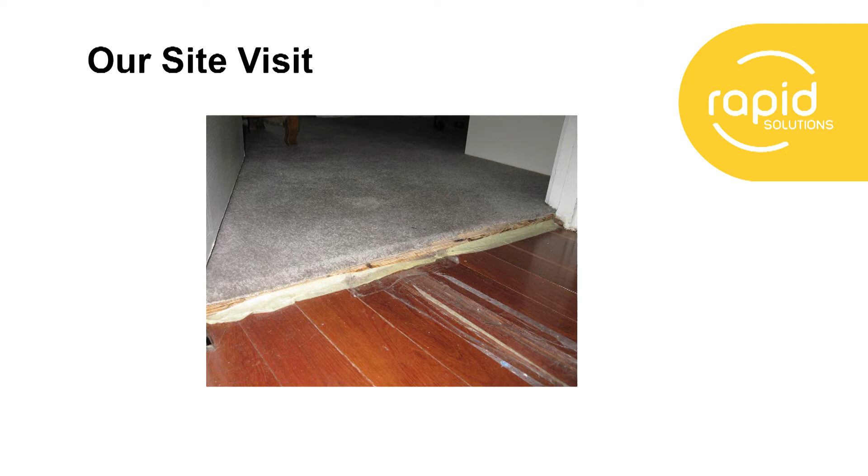So it doesn't really matter whether it's pre-purchase timber pest or pre-purchase building. They both have the date and time of the inspection, the weather conditions, and whether or not the building is occupied, which obviously affects how much access there is to inspect on a visual inspection.

Then it goes to the scope. Now the scope deals with what the purchaser can expect the inspector to have done, and what it says is the building and property within 30 metres of the building subject to inspection. So fairly standard stuff - the main building was inspected, as were the surroundings up to 30 metres. And this is a rural property, so there were 30 metres pretty much in all directions from the property.

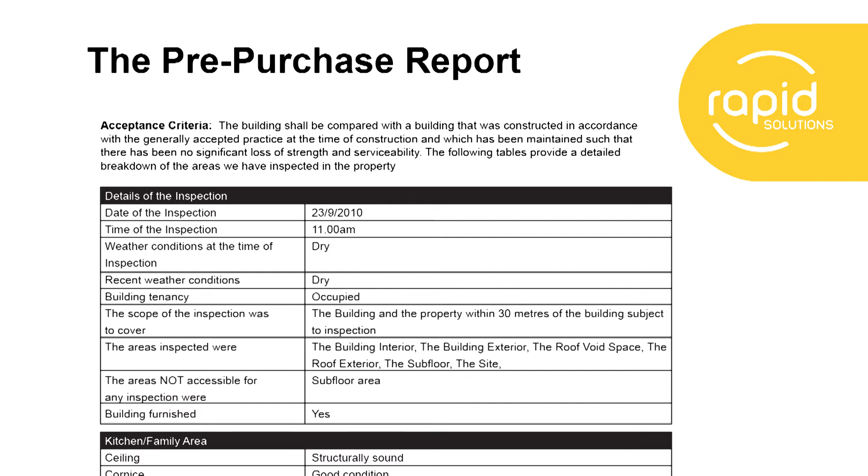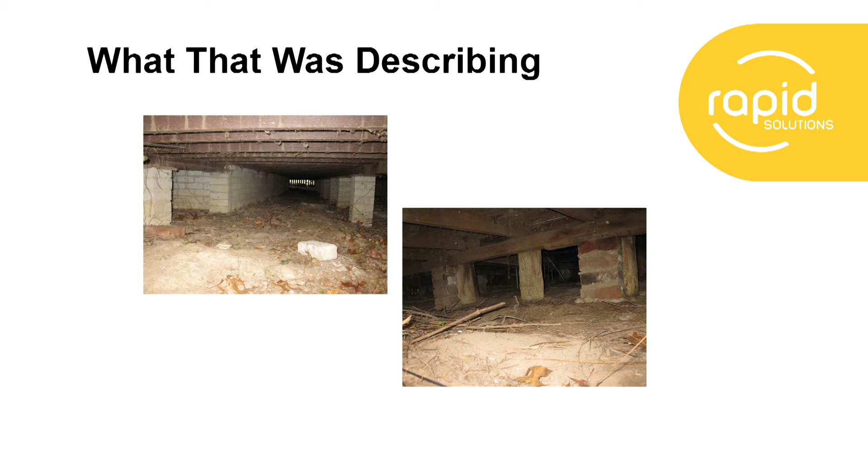All of that is absolutely right. You see from that photo on the previous slide that there are in fact brick posts, steel posts, and timber stumps. It's quite true, quite right to say that timber stumps provide a concealed entry point for termites.

The problem, however, wasn't particularly any of that. There was some rumbling from the homeowner about the fact that if he'd known there were timber stumps holding up the house, he wouldn't have bought it, and that kind of thing. But really and truly, that wasn't the issue in this case.

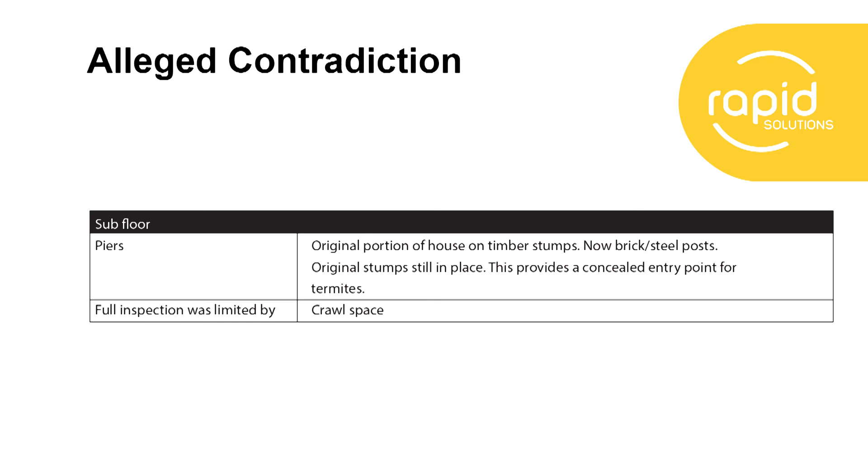So that's the first case study. Now moving on to the second case study.

The second case study is a claim from New South Wales, where a father and son conducted an inspection together. There are views about whether it's sensible for two inspectors to do one inspection and produce one report, and really the jury's out on that, because one inspector can mess up an inspection just as readily as two.

But in my view, provided they stick to their own particular areas and talk to each other, and have a good system in place to ensure the findings from the inspection are reflected in the report, then that's as much as any inspector can do.

Now, the instructions for this particular inspection came through the agent, and all of the relevant areas were inspected, but termite mudding was missed. Because termite mudding was missed - and the key recommendation that needs to go into every single report, whether it's a building report, a timber pest report, or an annual termite report - if you see termite mudding, you must recommend an invasive inspection by a builder.

Why is that? Because the dollar value in claims is always in what the termites have done. There's obviously some cost to killing termites, but generally speaking, that pales into insignificance compared to $200,000 to repair termite damage. Here's a photo of the subfloor.

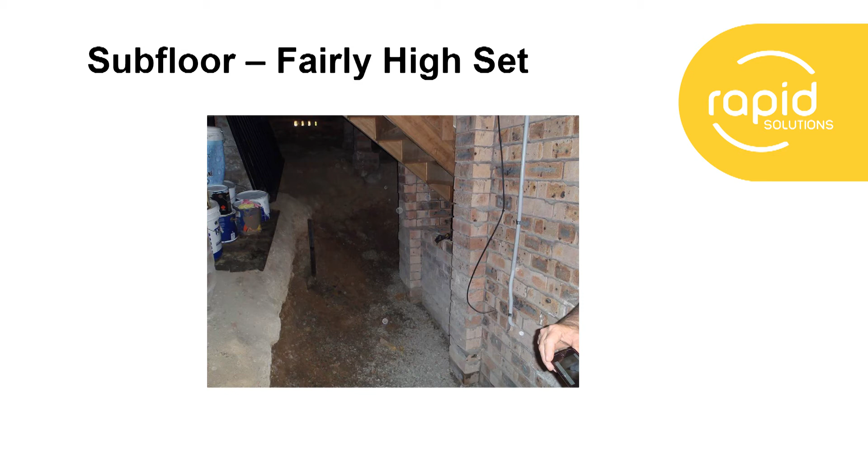I suspect that was the case here, because there was nothing else in this inspection to suggest the son was inexperienced. But in this particular case, had he taken a ladder and inspected the area at the top of that brick wall and below the floor, there is a void. And inside that void, there were, unfortunately for him, fairly obvious termite leads.

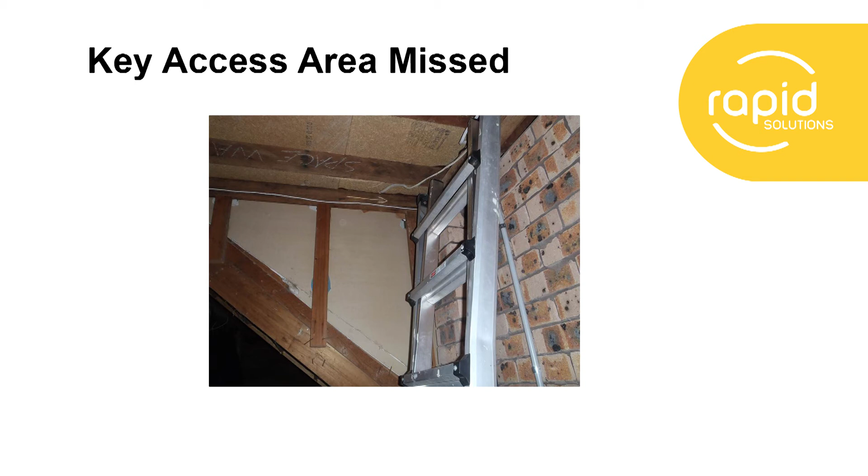Now I'm going to show you the next photo, of that void between the floor and the top of the brick wall.

I'm showing you the photo because I'm a massive fan of photographs. Photographs for me are the most important thing, if not necessarily showing damage or what the problem is. What the photos do brilliantly is show what you can't do as an inspector, why you weren't able to access a particular area, and they visually do so much more than words can do.

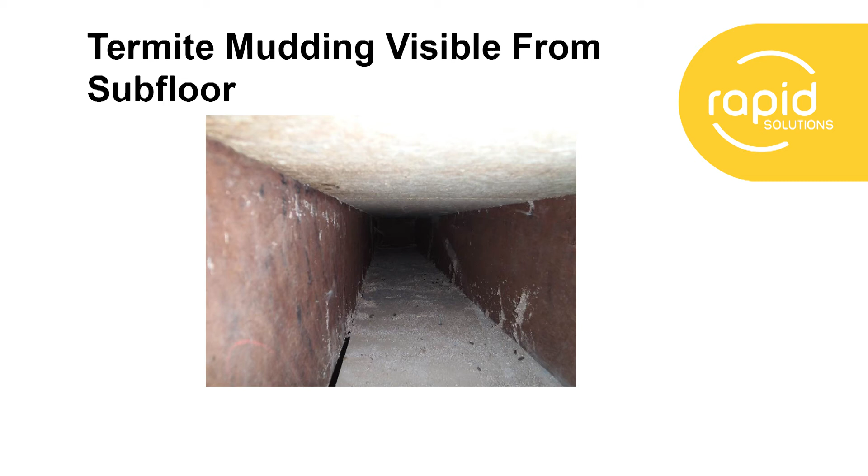Just to make the point about photos: whilst they are fantastic and essential to all reports, and as I say regularly to anyone who will listen, if you're not using photos in your reports, start using them, because they are an essential tool. They're not perfect, as can be seen from this shot.

So what's the point of this case study? The point is really to highlight the need for awareness in any inspection that a particular person is undertaking, to be alert to the building that they're inspecting.

And the inspection is governed in part by the systems that each inspector will have been trained in and will have developed over the years. Most inspectors I've spoken to about this will tell me they have a particular methodology of going round a building, to ensure they don't miss anything.

So some go left to right, some go right to left, some will do the roof void first, some will do it last. It doesn't matter particularly, so far as I'm concerned, in what order you do it, but you need to ensure that you have a system.

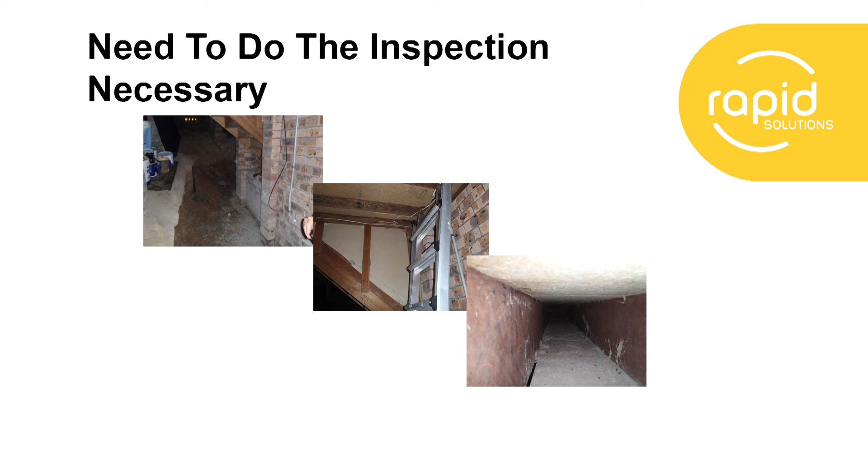So the third case study in this little sequence relates to a fairly common problem that we encounter. In this particular inspection, it was a pre-purchase timber pest inspection, and there were termites in the roof void, which we believe were certainly there at the date and time of the original inspection. The later invasive inspection undertaken as part of the claim found that there were termites throughout the house, so it was a very expensive claim and a really avoidable one in our view.

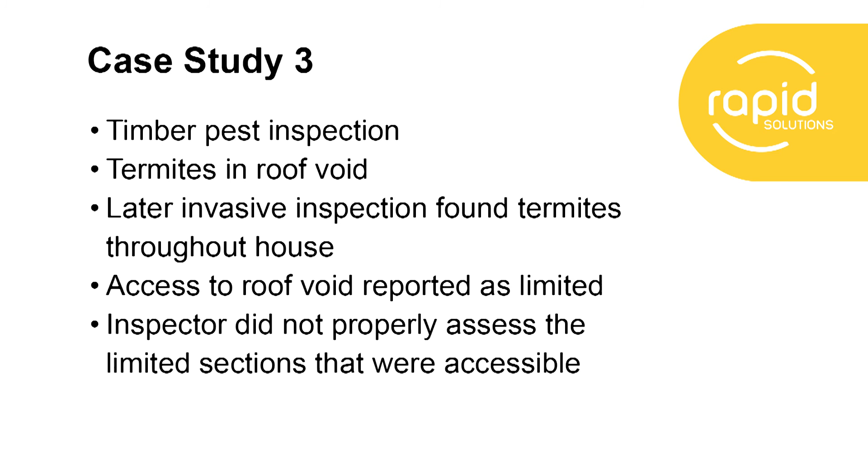The issue that came up is a very common one, relating to what is capable of inspection in an area where an inspector encounters access restrictions or limitations. You can see from the photo there's a landing, and access to the roof void is somewhat unusual in that it's in the wall space, but there's no particular problem climbing into that. An inspector would probably need a step ladder, but other than that, there's no massive issue.

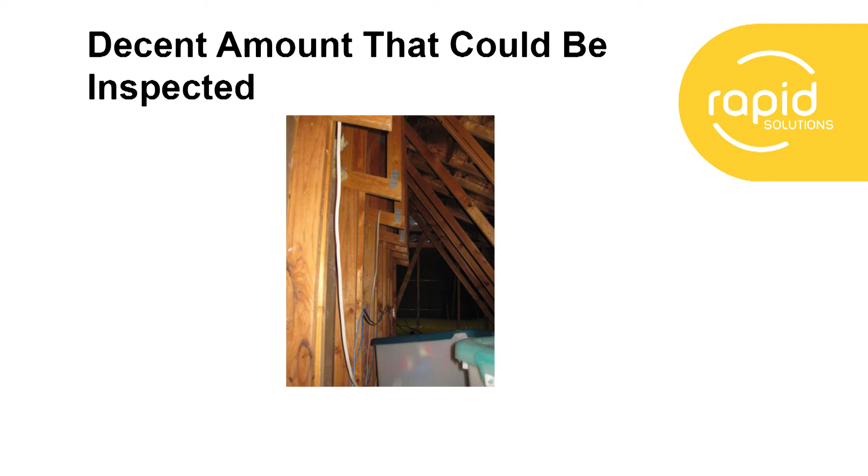From this particular photo, a slightly different angle, you can see there's also insulation, and the insulation goes above the ceiling timbers and obviously has an impact on what is capable of being inspected in a timber pest inspection. Whilst this was a timber pest inspection, it was a combined report with a building report, but the particular complaint was against the timber pest aspect of it.

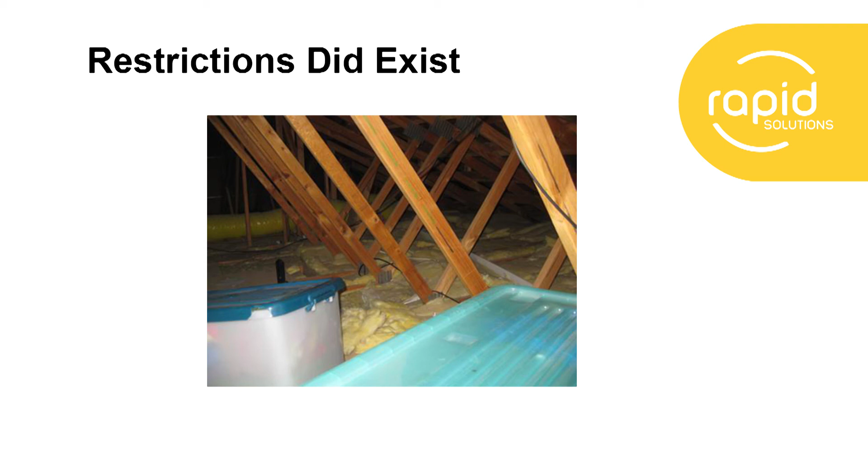The point I'm making is not unique to building inspections or timber pest inspections. It is something that comes up with all types of inspection.

So why is that a problem? I think it's a problem in this particular case because that was the sum total of the inspection. The inspector, had they simply stepped inside the roof void area and looked around, would have, we believe, identified these things.

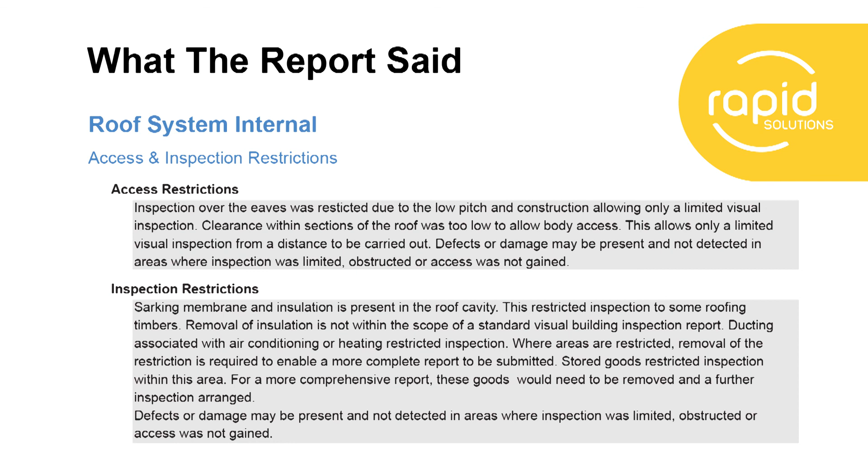Now you can see there's some blue electrical wiring, the same wiring that appears 3 slides earlier, just viewed from a different angle, and it's quite apparent that there is termite mudding in the middle of that piece of timber. Similarly, in the other 2 photos, just by the sarking in the middle photo you can see some termite damage, and between the timbers in the 3rd photo.

Now, it's perfectly possible that termites can do that level of mudding in a matter of days, so how could we know beyond doubt, or on the balance of probabilities, which is the legal standard, that mudding existed at the date and time of the original inspection? Unfortunately for the inspector in this case, the standard gap between exchange, or the contract being crystallised at the end of the cooling off period, and the settlement date was not the normal 6 weeks, which it tends to be in New South Wales. It was a shorter period of about 4 weeks.

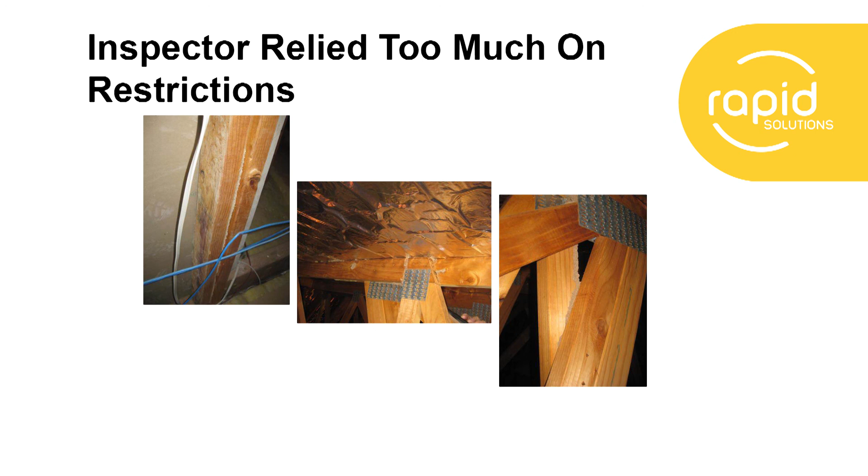So to sum up the three case studies: case study one was from the ACT, and it's really important to be clear about what areas you can and cannot inspect. And if you say you can't inspect an area, but do make comments about that area, then that needs to be clear how it was possible for you to do that.

So if you recall in that one, what I was talking about was trying to locate the inspector on the outside, describing the subfloor as having no bodily access. And then when he was reporting on the subfloor piers, that viewed from the outside I could see, and then describing the piers and that kind of thing. And where he was talking about the access limited to crawl space, it would be, once access is gained, it will still be limited by crawl space. So all of the information was right in the report, but it didn't fit together because there simply weren't enough words to explain what was going on.

So the second case study, that was the one where you had the two inspectors, but that wasn't the issue. The issue was that they followed their normal routine, the normal access, the normal inspection process that they would follow, but didn't consider that they might need the unusual piece of equipment, which in that particular case was a ladder inside the subfloor. Had they done that, we believe they would have identified the termite mudding that was in the void between the piers and the bottom of the floor.